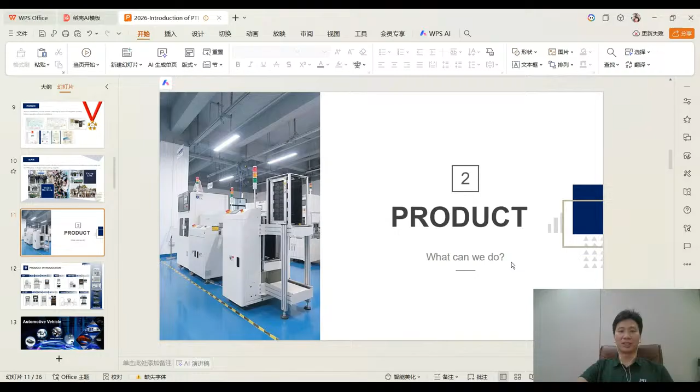The second part is about our product. What exactly can we do? Most of our products are standard products, including ICT, EOL, FAI, inline, test fixtures, test units, and some test modules. I will introduce you in detail in the future, okay?

Today I prepared a lot of videos for you. You can have a look at some projects we have already done in automotive vehicles, including PCBAs, suspension system, central control system, engine control system, automotive driving system, and lighting system.

All of the projects were developed by PTI 300. PTI 300 is a test system designed for function and aging test. It's developed on NI LabVIEW and TestStand, beloved by our customers for its convenient modification and maintenance.

When we do the project, we will share the original code with our customer for their own maintenance. This system can integrate signal generator, visual inspector, program firmware, and a lot of other standard test cards for full function test.

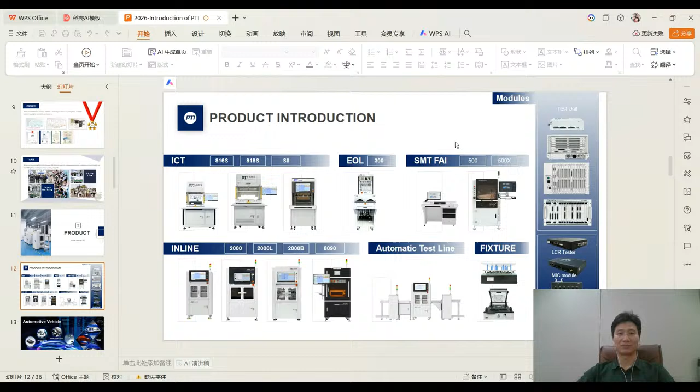It's okay right now? It's okay right now?

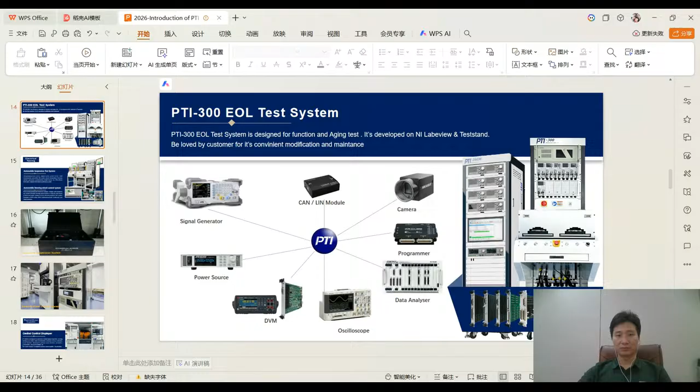Our system can integrate camera, program, and function. We can use some standard external instruments. Of course, we can provide some test cards for your solution.

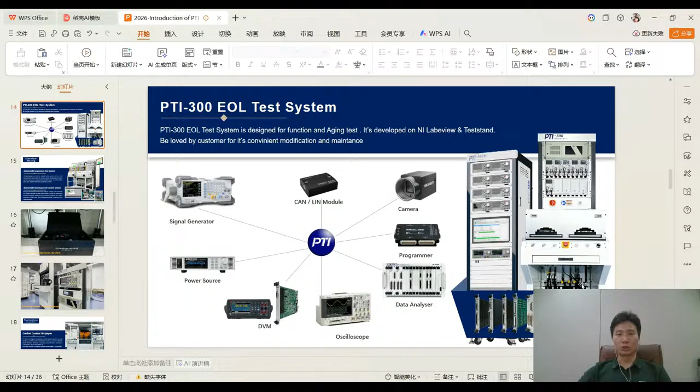Next, let's have a look at something. Here are 2 projects about automobile suspension test system and automobile steering wheel system. Let's have a look.

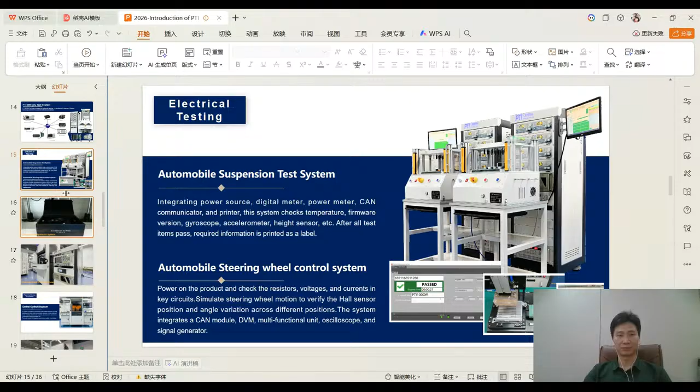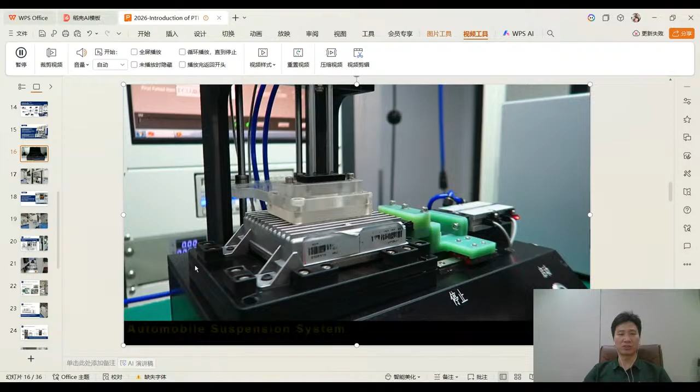This is the automobile suspension test system. This is the final product. And these are the suspensions. This is the PCBA tester. We have 2 systems here, right?

This one we call the FCT, for PCBA, and this one we call the EOL, for final product. This test system is totally the same, we just need to change the test program and the test fixture.

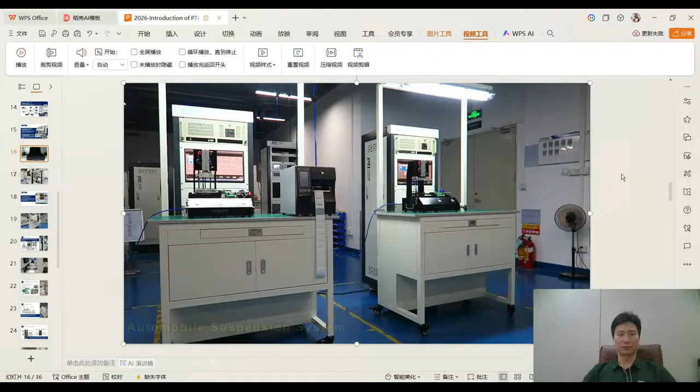Let's go to the next part. This is a project about the steering wheel control system. Let's have a look at how we do that.

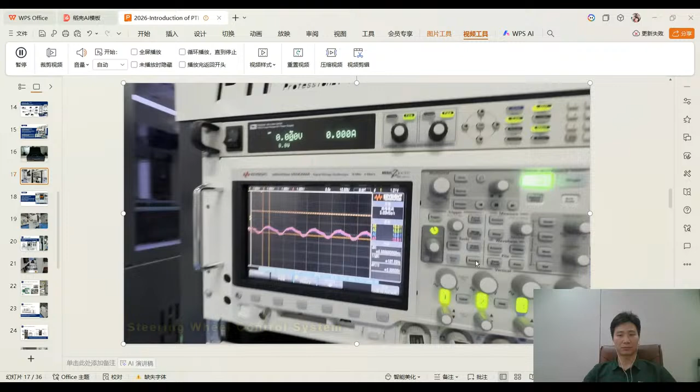We put a small cabinet here because a lot of instruments cannot be put inside the test bench. So we set a small cabinet for the instruments. Barcode reader.

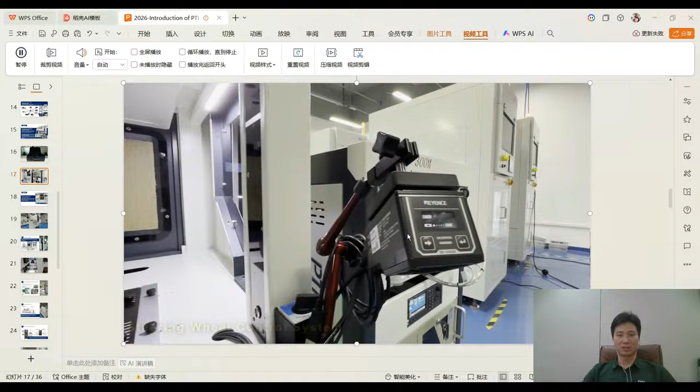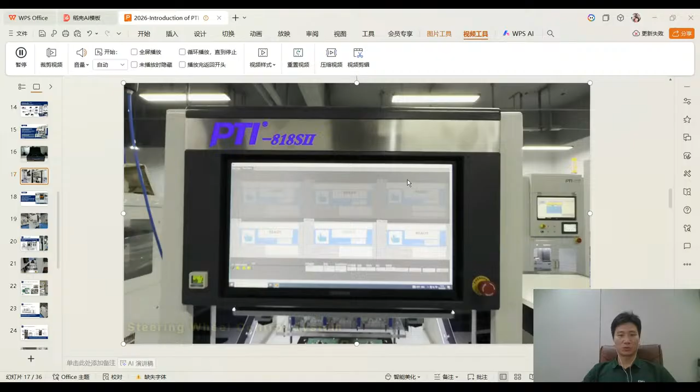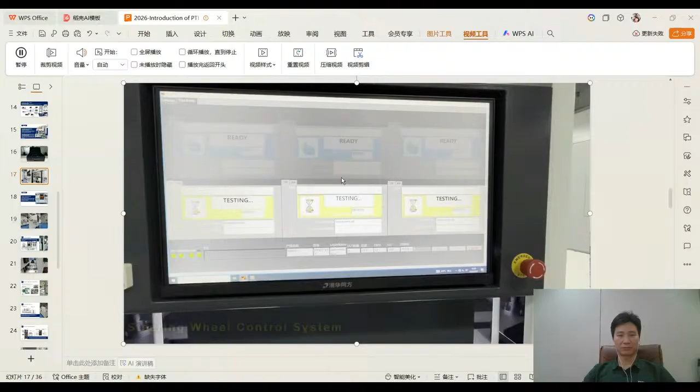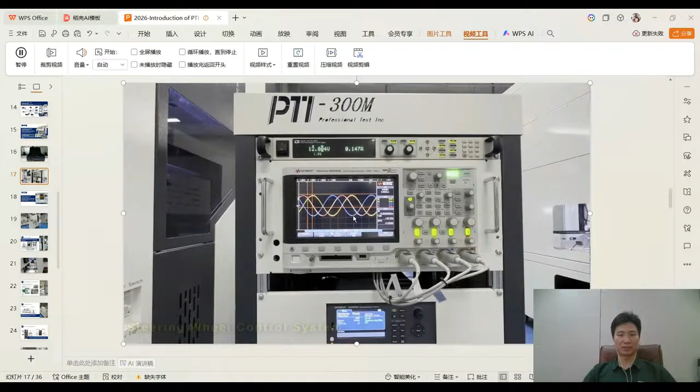We can test several boards at the same time. Oscilloscope from KeySight, data analyzer from KeySight, power supply from iTech, barcode reader from Keyence.

When test is finished, the board will be marked as green. Here we can see it as green.

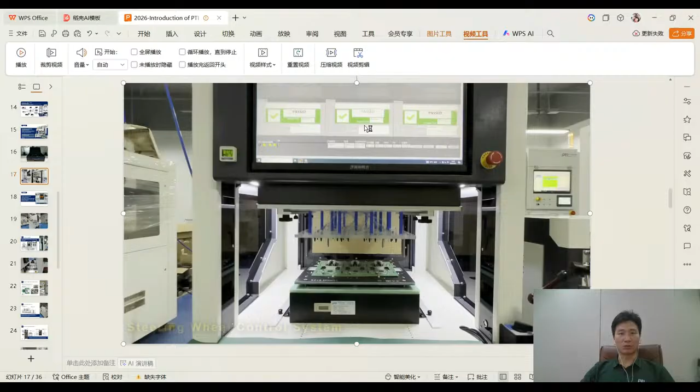Let's go to the next part. The next part is about electrical vision inspection. Do you have a question about that? Yeah, KeySight.

Yes, we have agent in Spain.

Okay, let's continue. The next one I wanted to share with you is the test system of the central control panel. This is totally different from the electrical tester because we combine function test and vision test together. Let's have a look.

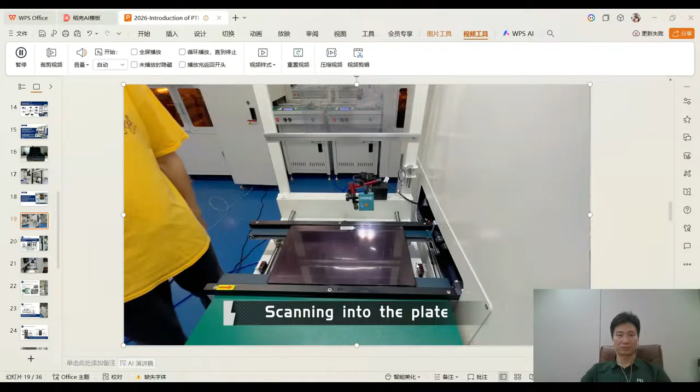The panel will move inside the test station automatically. Power on. I'm sorry, I will do it again.

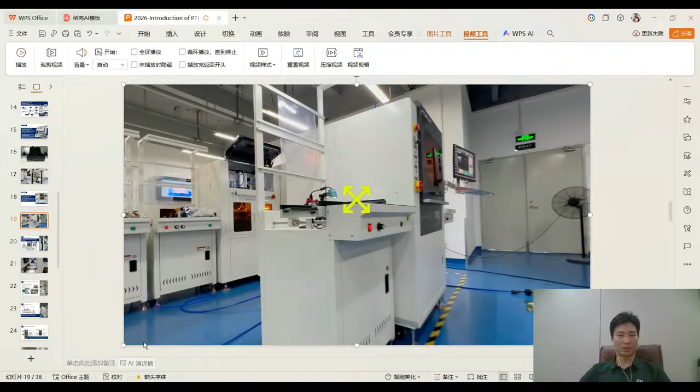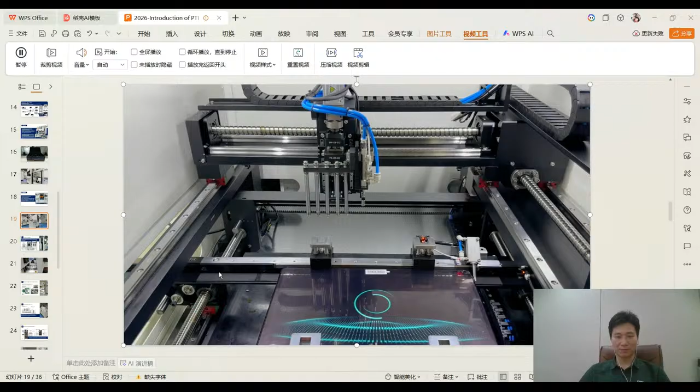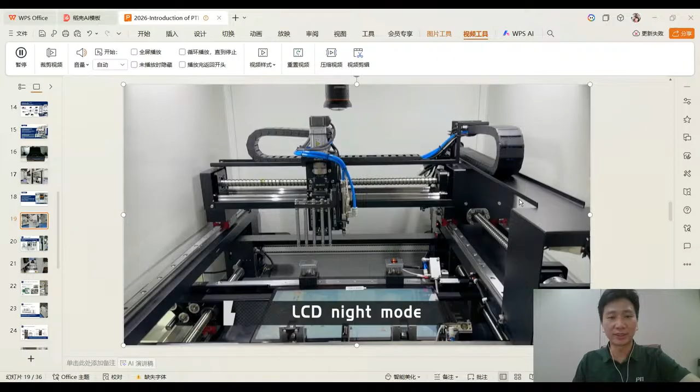Scanning the barcode from the product. Then the product will automatically go inside the test station. Power on. Check the version and the pixel of the product. Also, we can test the operating current.

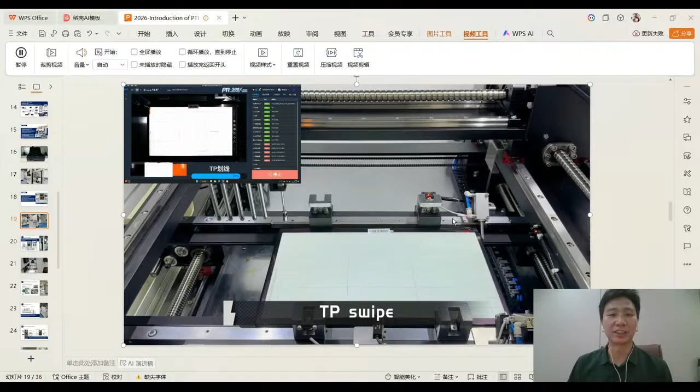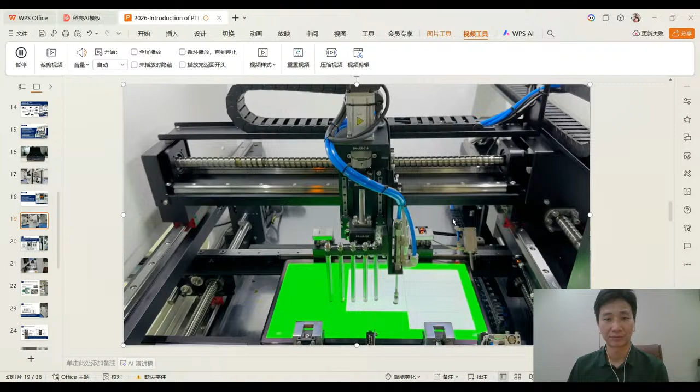We also made some simulation of our fingers. Put one finger to touch the panel to make sure every function is okay. And the next part is simulate our 5 fingers. When the test is finished, the report will be generated automatically.

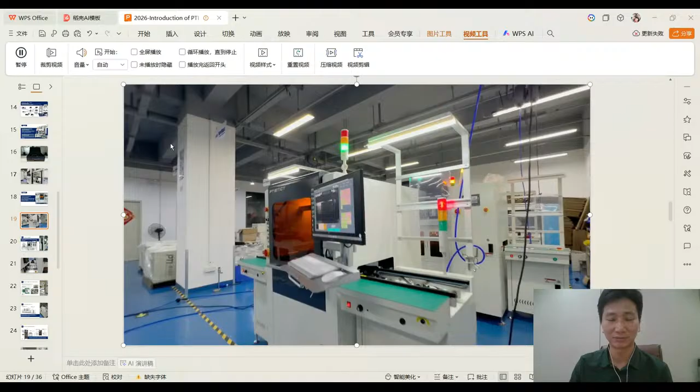Okay, let's move to the next. The next project is about ICT and FCT. This system includes MDA and MDA plus functional test. First one, let's have a look about the single core offline test.

PTI 818S2. Use single core to test the 4 boards sequentially. Voltage check at first. When all the critical voltage is okay, we will do the program. When the program is finished, we can check all the functions. Here is the oscilloscope to test the loop of our product. We can analyze the value from the oscilloscope.

Then in the next video, I will show you some videos to see how double boards be tested together. We call this multiple core testing. Here, this is a barcode at the beginning. The barcode reader will get the barcode of the product.

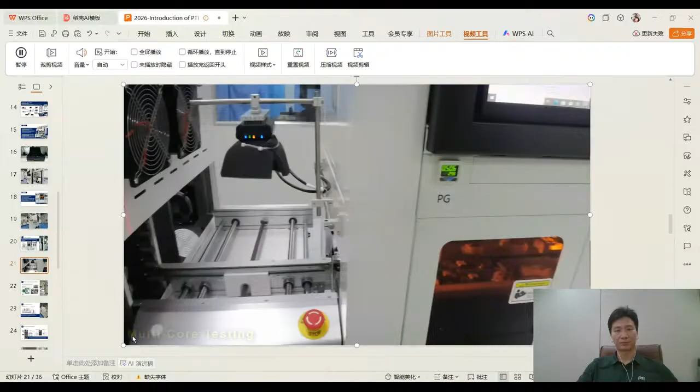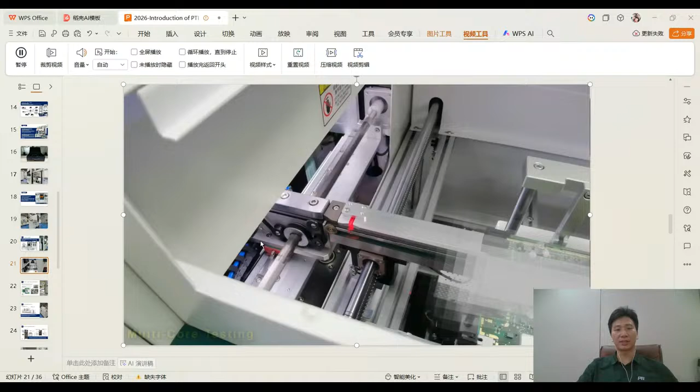Here we can see 2 products were tested at the same time, right? This means we can save half the time. When the test is finished, the board will be sent automatically. This is about the dual core test of the product, meaning multi-core testing.

We also provide some solutions to update offline to automatic line. We can see here a lot of people already have some offline instruments, right? They don't want to pay a lot of investment to do some automatic line. We want to use their original system and use some mobile device to make an automatic line solution.

We can see that here are 4 test systems, offline systems, right? 1, 2, 3, 4. If we do that, maybe we need 4 people. But when we use a robot, we can combine 4 test instruments and save 4 operators. Let's have a look.

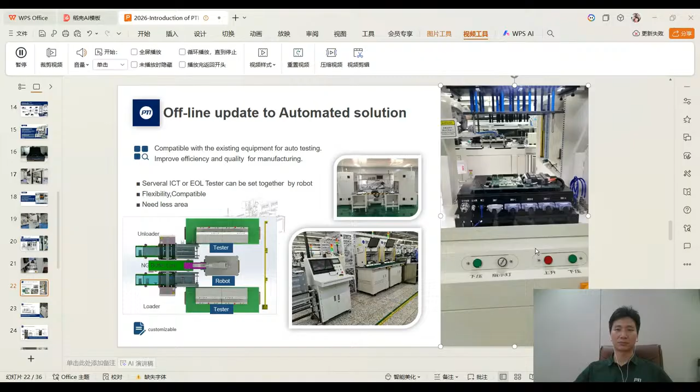Okay, let's move to the next part. The next part is about inline type. We have 2 solutions for inline type. One we call the classic solution, and another we call the high standard classical solution.

Here is a demonstration line about ICT and FCT. Let me introduce it to you: the loader, ICT NG buffer, FCT NG buffer, and unloader. At the beginning, we can put the product directly inside the loader, and all the tests will be automatically finished. We don't need any operator. Let's have a look at it.

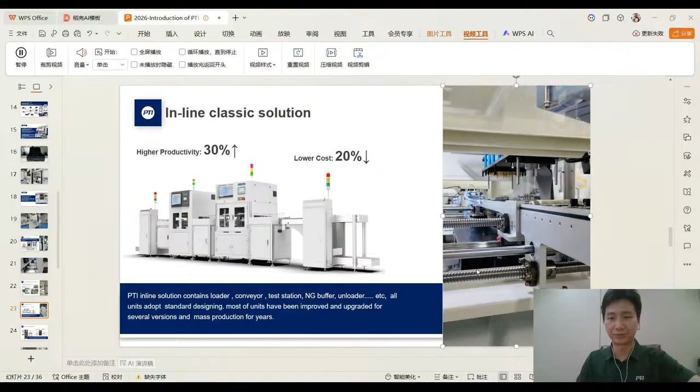Conveyor here, board inside the ICT tester. This system uses PTI 818S. We can see here is the NG buffer, meaning when the test is finished, if the product fails, it will be stored here. Yes, this is a failed board.

When the board passes, it will directly be sent into the next station. Let's have a look. Yes, the next one passed. It will directly move into the next station.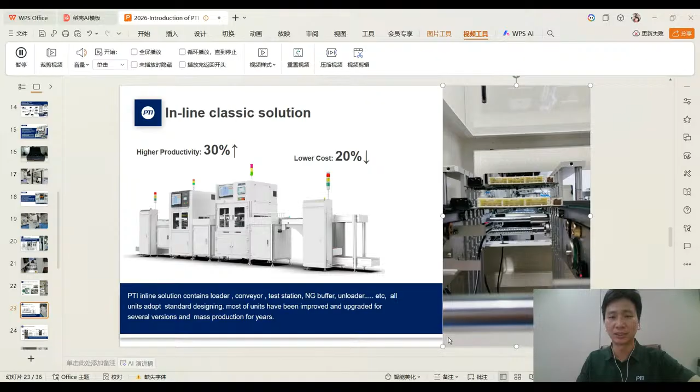Okay, let's go to the next part. The next part is about the high standard solution. Why do we call it high standard? Because this inline system is compatible with Keysight and Teradyne, and also supports short wire fixture. Let's have a look.

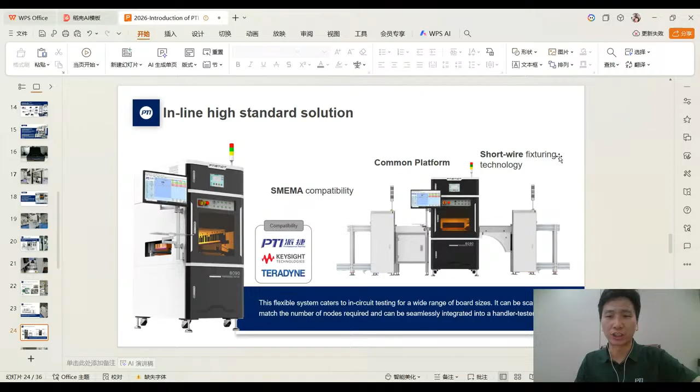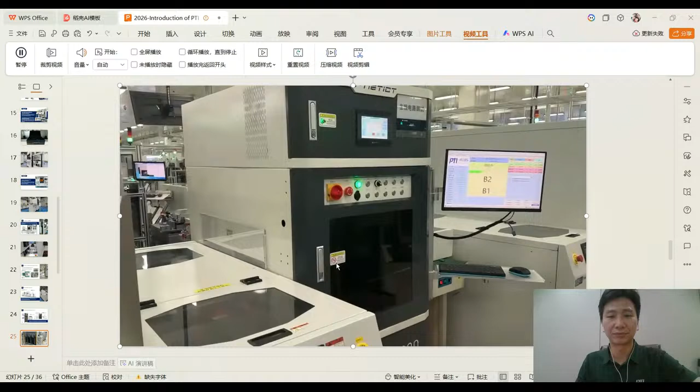Yes, this is the PTI 8090. It's been settled in our customer's factory.

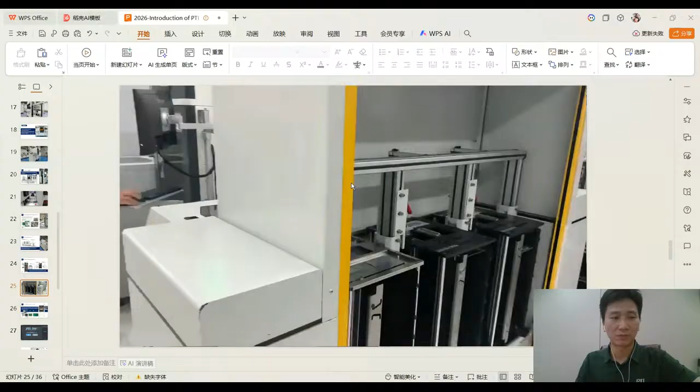Okay, let's continue. The last one is about FAI. FAI is the abbreviation of first article inspection. Usually, we use this kind of instrument to ensure whether the components are mounted correctly or not. It contains an optical inspection and electrical test system. Components with silk can be checked by the optical system automatically, and the others will be checked by the LCR meter. The others means some components without silk.

We have two kinds of test systems here. One is semi-automatic, this one, and this one is a full automatic system. This is the semi-automatic test system, and this is the full automatic test system. The difference between the two instruments is just about the flying probe. Let's have a look.

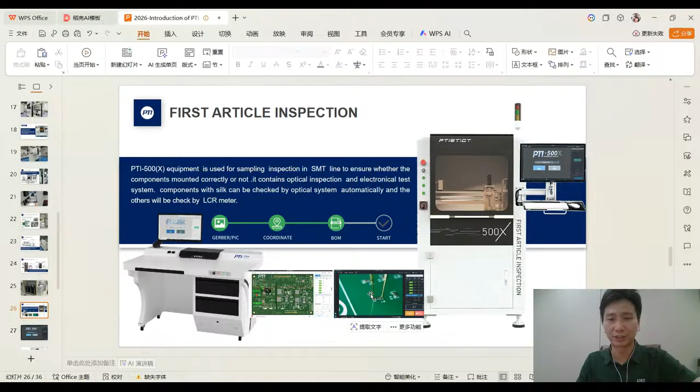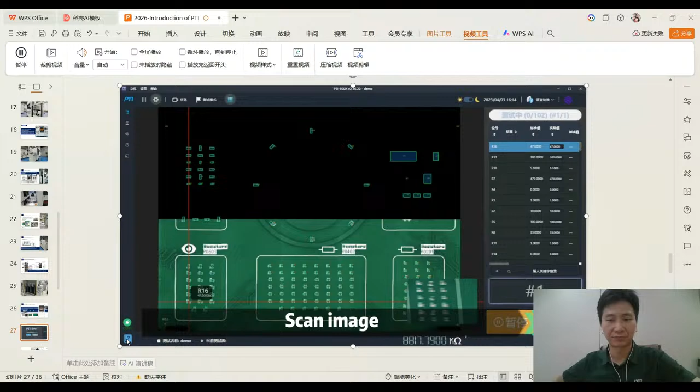Our software can support multiple languages. The picture will be captured by camera, and all of the components with silk will be checked by AOI, by visual. If the visual failed, our flying probe will double check it again.

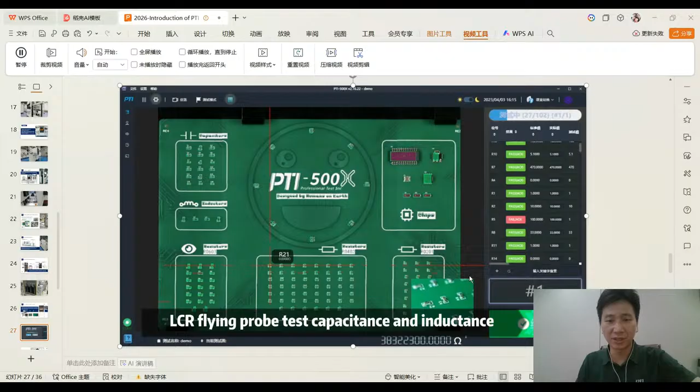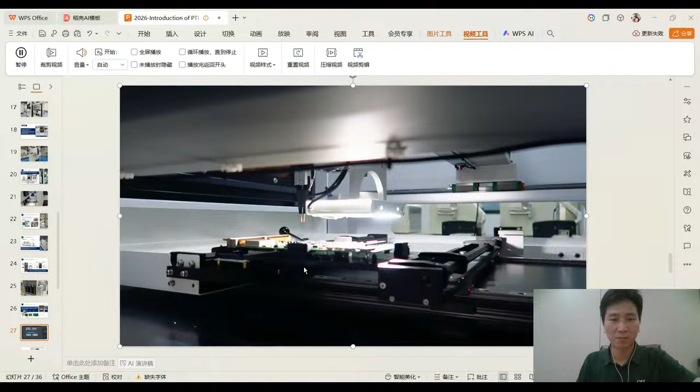Here is the flying probe. Usually we use it to test some components without silk. The test speed is very quick, nearly 1 second per component.

If you don't have any question, I will move to the next step. If you have any questions, you can leave the comments and I will reply you later.

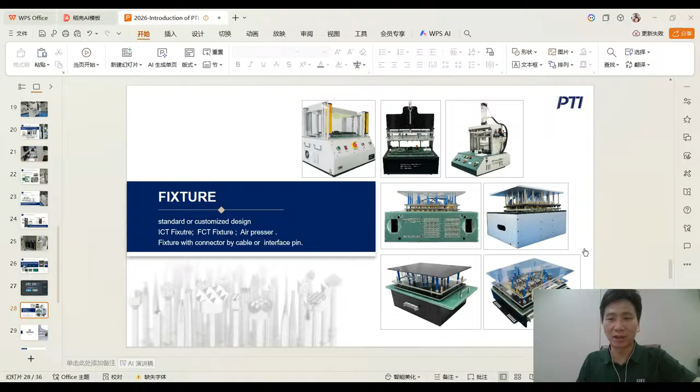The next part is about our service, why our customers choose us. Our company has a lot of systems to keep our quality, our competitiveness, and our continuous service.

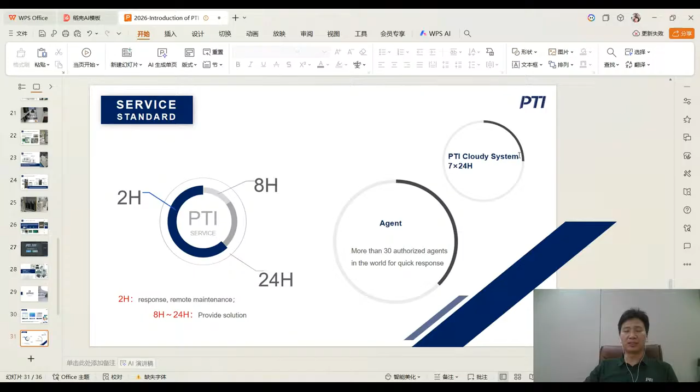We have a lot of agents all over the world. If you need some support, we can ask our agent to visit your company to help you figure it out. If you want to study a lot of technology from our company, you can visit our cloud system. A lot of operation and documentation have already been presented in the cloud system.

When everything has been finished, our customer service representative will give a double check with you to make sure everything has been finished. If you have any questions or suggestions, you can tell our service representative and they will ask our company to give you more support.

Most of our products have a very high quality. Usually we can do the after sales by remote. If we cannot figure that out, we will ask our agent to visit your plant to service you, okay?